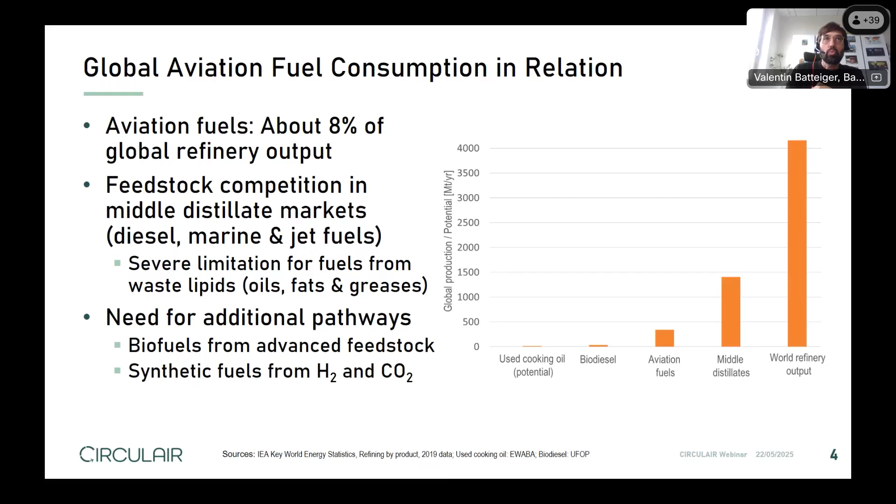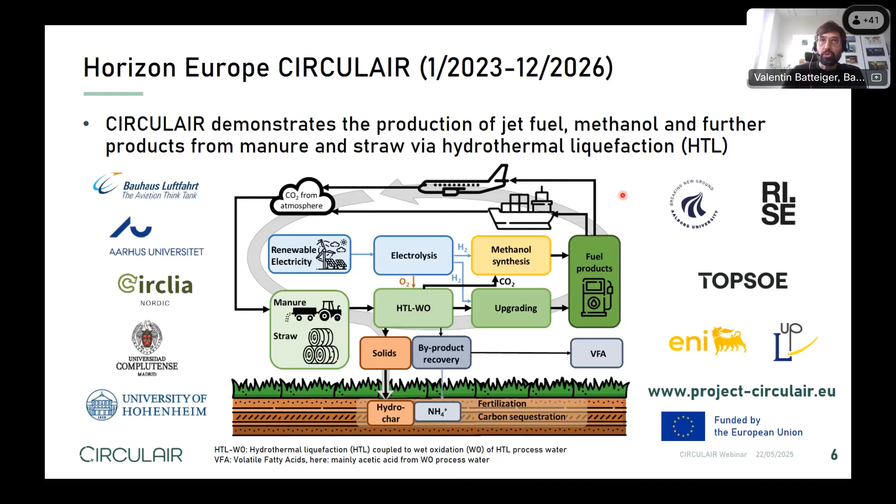So we were starting building a lot on preceding Horizon 2020 projects, where one example is HyFlex Fuel, where our project partner, Aarhus University, was running a pilot plant. Then there is another project partner of ours, Circlia Nordic, that is already going into upscale at higher technology readiness level and larger scale with a very specific business model.

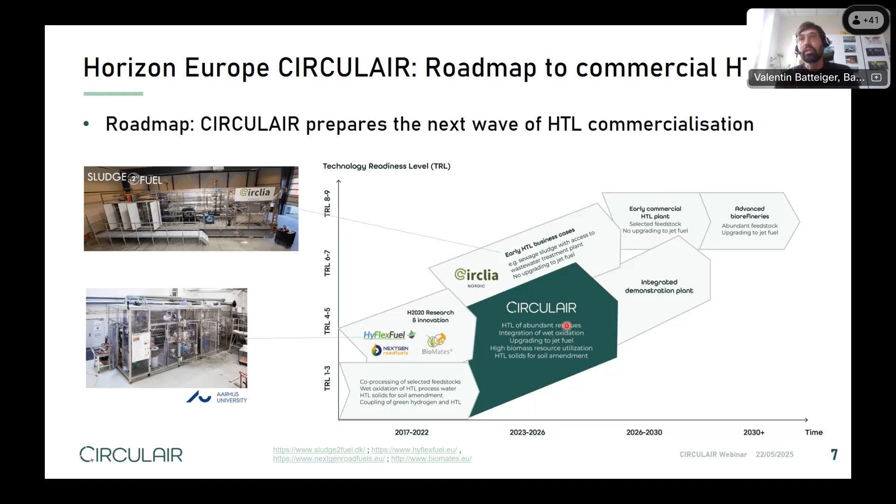And we at CIRCULAIR are, so to say, preparing the next wave, looking at a very holistic thing and also developing additional technologies that can be important to bring it into the system in the next wave of commercialization.

So what is the ambition beyond the state of the art in HTL in this project? One important thing here is this integration of HTL with wet oxidation of the HTL process water. And relating to this is the recovery of suitable byproducts from all major process streams.

The organic species are mainly then converted into CO2 and volatile fatty acids that are then still in the process water and could be recovered. And the CO2 can then be combined with hydrogen to form methanol. So this is the big chunk to get a much higher carbon efficiency of the overall process.

And then we also look at the CO2-rich HTL gas, utilization of the solids and so on to get to a very high product fraction at the end of the day. And we also look at the upgrading of the biocrude here in this project.

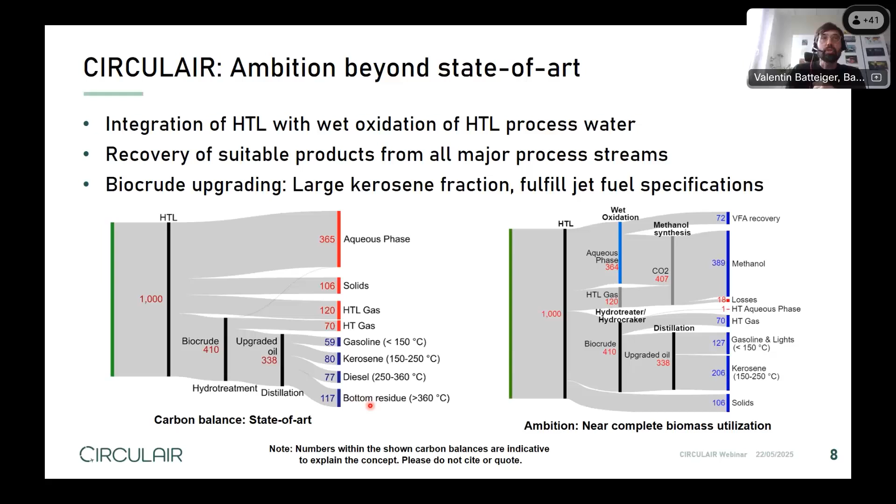And this translates now into four main objectives that we have in the project. We want to contribute to the development of cost-effective pathways to biofuel production from abundant feedstock. We want to produce a high share of on-specification jet fuel from HTL biocrudes.

We want to prepare for near complete biomass utilization, and I have not really mentioned that before, we also want to enable negative contributions to the greenhouse gas balance of HTL fuel production. And this is mainly via the solids in this project.

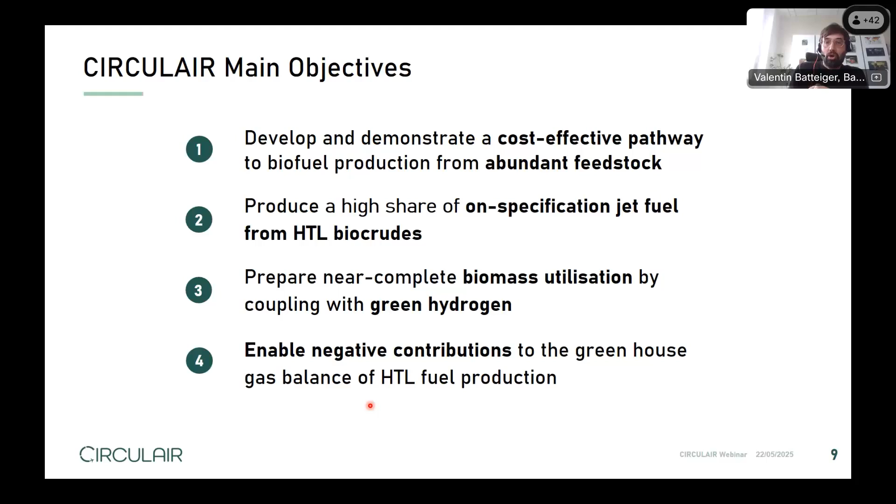Okay, one word on the feedstocks. So why are we looking at manures and straw? This relates back to the HyFlex Fuel project, the preceding project, where former project partner DBFZ was analyzing residue and waste availabilities in Europe.

The other thing is these potentially cost-effective pathways. So cost efficiency comes from HTL itself, which is increasingly perceived as a prime option for wet waste conversion to biofuels because we don't have the need to dry the feedstock. We work with an aqueous slurry here. But one thing that results from this way of hydrothermal conversion is the process water, and this is challenging to deal with. So the process water looks like this.

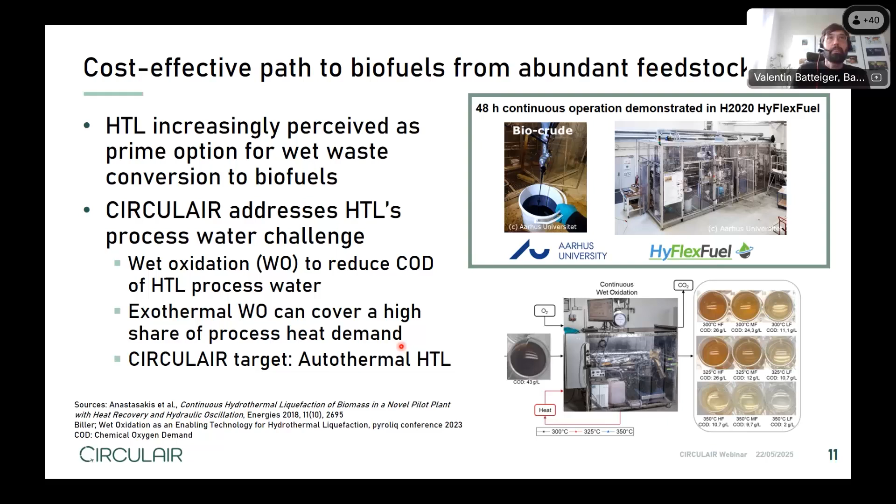And this is the pathway that we again want to demonstrate here for the specific biocrudes that we are producing. In parallel, we look at slurry upgrading as an alternative or amending technology to fixed bed hydrotreating, and we investigate hydrocracking as well in order to, at the end of the day, really have a higher share of the jet fuel product.

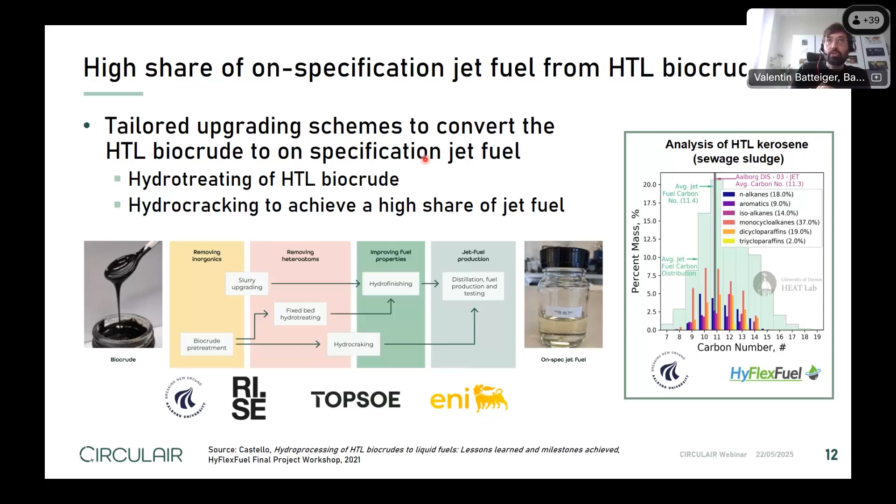Next thing is the utilization of co-products from all of the major streams that result from hydrothermal liquefaction. When we look at the process water from wet oxidation, mainly volatile fatty acids with a high share of acetic acid could be recovered via liquid extraction or via adsorption, and also the ammonia could be recovered via adsorption, potentially using HTL solids, so preserving some of the fertilizing effect.

Then the next big thing is the CO2 streams. Both the HTL and wet oxidation gas contain mainly CO2, more than 90% in these streams. And when we recover it and clean it up sufficiently, then we can use it, for instance, for methanol synthesis using green hydrogen, so with a coupling to the power-to-X world.

And the last big thing is the utilization of the HTL solids. Here it's about analyzing what these solids are, and how we can modify these solids such that they are suitable for soil amendment and carbon sequestration via this amendment of the soils.

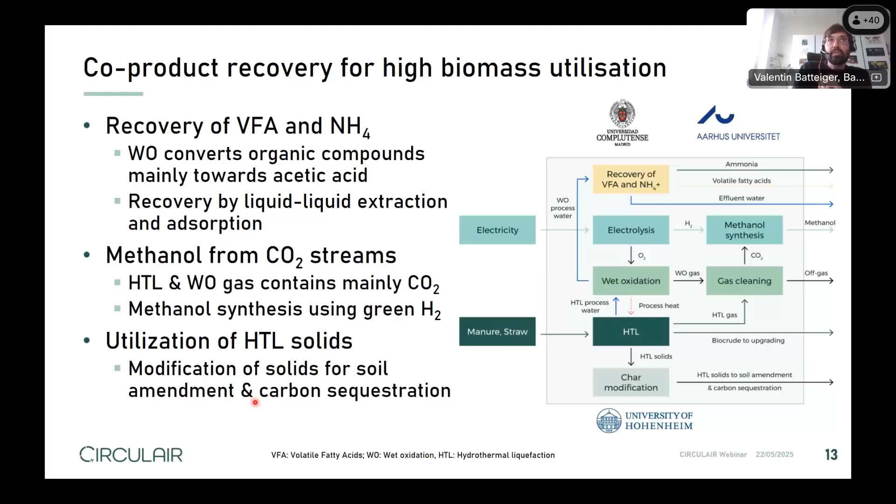So this is the third target, and the fourth one is carbon negativity, and this relates to the system analysis that we at Bauhaus Luftfahrt are contributing to the project. Here I show some preliminary results that stem from a two-step approach for the system analysis. One is an initial modeling of the fuel pathway pretty early in the project, and then a first evaluation of fuel production costs and LCA. This is a step that we have just finished, and where you now see the preliminary results.

And then in the second half of the project, we will go into refined modeling, and at a later stage of the project, we will have the final system analysis results available. So what you see here today are these preliminary results from this first evaluation. And in terms of LCA, we see an 84% reduction in global warming potential compared to a jet fuel reference.

This would already be compliant with the EU Renewable Energy Directive, which for biofuels foresees a minimum of 65% reduction. One has to say that it's as good as 84% reduction, because we are utilizing renewable heat here that comes from this wet oxidation, and we also utilize mainly renewable hydrogen for the upgrading and also for the methanol synthesis. So this is the key here.

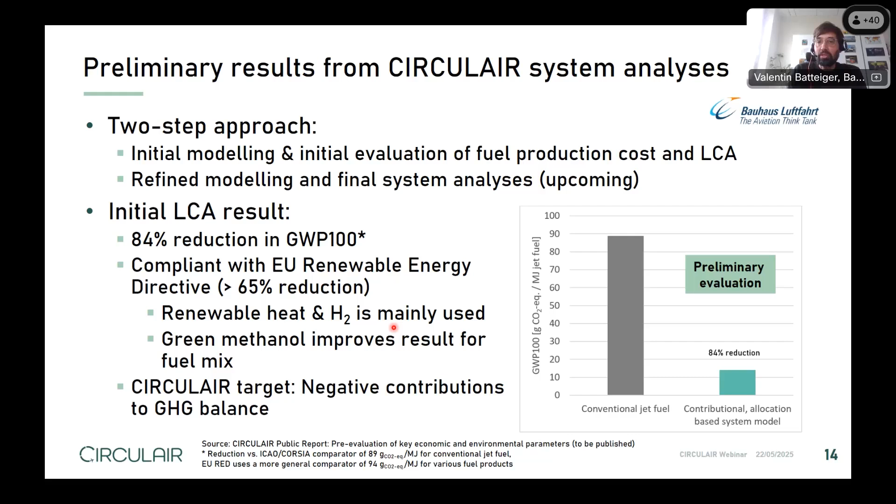And also one may expect that this result of the fuel mix is somewhat improved also by the green methanol. But in any way, this 84% is a nice signal in first place, but it's not yet at target with what we want to show in CIRCULAIR, which is negative contributions to the greenhouse gas balance. But here we have not yet implemented some of the main levers that we have. So what are the main levers to achieve these negative contributions?

So one is the HTL solids for carbon sequestration. This is in this other analysis, but it's not yet a good value that we have here. So here, University of Hohenheim is currently investigating the utilization of stabilized HTL biochars for soil amendment in agriculture, and they will also evaluate the carbon sequestration potential, and this evaluation will then go into the final results that we will have. What we have also not implemented is a credit for a change in manure handling practice.

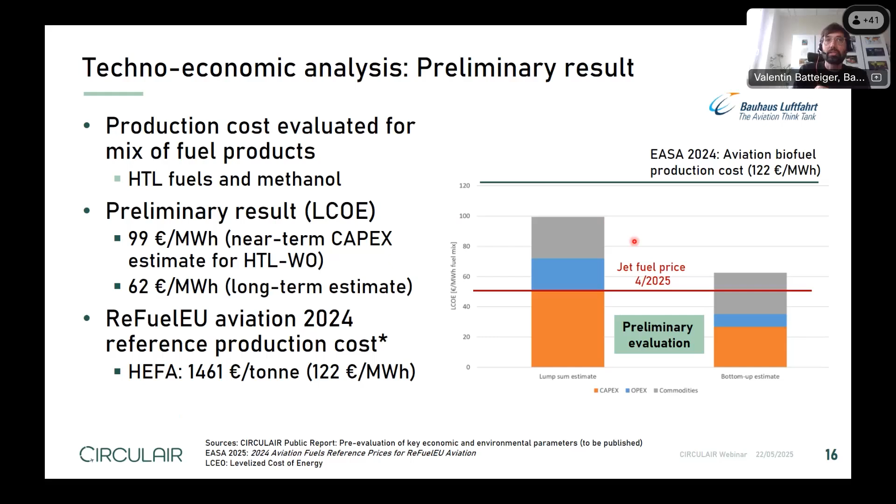And what I have shown here as two lines for comparison is the current jet fuel price, and this up here is some reference value for aviation biofuels. So mainly this should be HEFA that is provided by EASA in the current report to estimate the fines for ReFuelEU Aviation. And what you see here is a jet fuel production price that is somewhere in between. So this is certainly something that looks promising from this early perspective.

Summary and conclusion. So at the beginning, I motivated that we need liquid fuels to achieve the climate targets in aviation and in shipping. And very specifically, we have a specific need here for scalable fuels from advanced biomass, wind and solar. And this then also introduces the next presentation by Oskar, where this will be a key topic. Now, the CIRCULAIR perspective, we are aiming really at HTL conversion of abundant agricultural residues that could really provide large volumes of fuel. One important thing is that we address the HTL process water challenge by wet oxidation.

We want to maximize jet fuel yield and quality by appropriate upgrading schemes, then enable almost complete feedstock utilization by coupling with green hydrogen and recovery of products from almost all process streams. And we want to investigate the use of HTL solids for soil amendment and carbon sequestration. So these are the main aims of the project. And what I have shown towards the end is that pre-evaluation of fuel production costs and global warming potential fosters our motivation in the project, and it also points to some main levers for further improvement.

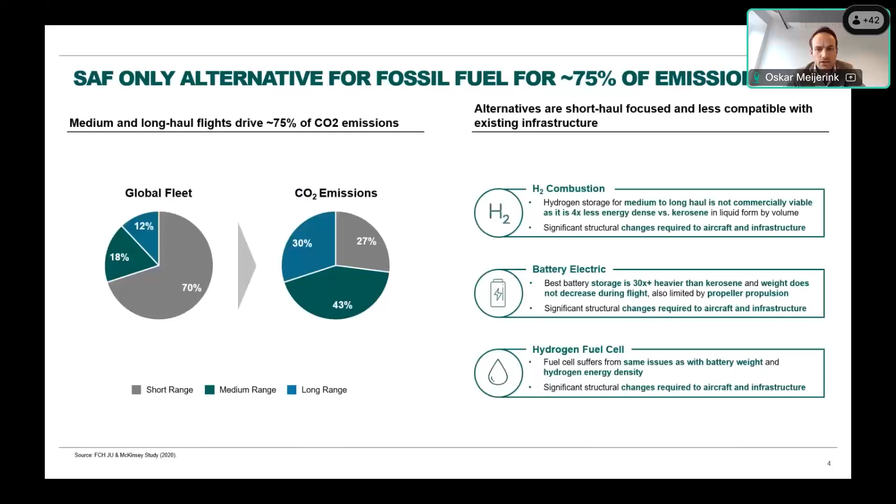So what you see on the left-hand side is always quite an interesting element to show, because about 70% of the global fleet and flights is short range flights, but those only account for about a quarter of the emissions. So you see that the medium and the long range flights account for almost 75% of the emissions, which are also the most difficult to decarbonize. So for some of those short flights, we see battery electric and some hydrogen combustion potential. But for these medium and long range flights, that's very challenging. And so for that, we are eyeing sustainable aviation fuel as a solution for the decarbonization of aviation.

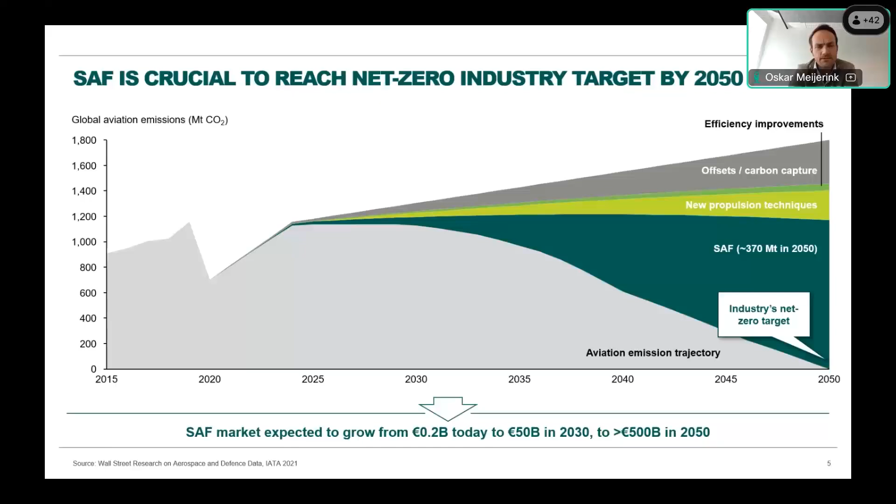With that in mind, we can see that sustainable aviation fuel can be produced by a number of pathways. So you may have seen many of those. We always like to say that SAF can be made from 3 buckets of feedstock. So on the one hand, and that's the dominant pathway today, is from waste oils and fats. So that's what we call the HEFA pathway, for example. It's waste oils, used cooking oil, residues from animal fats, for example.

The upside is that technology is very well proven. It works well. There's facilities out there. There's renewable diesel. There's SAF production. But the limitations are obviously around the feedstock availability. And we'll come back to that in a few slides. But the upside is that it works. It's ASTM certified. So that means that it can be used in commercial aviation, and is happening today.

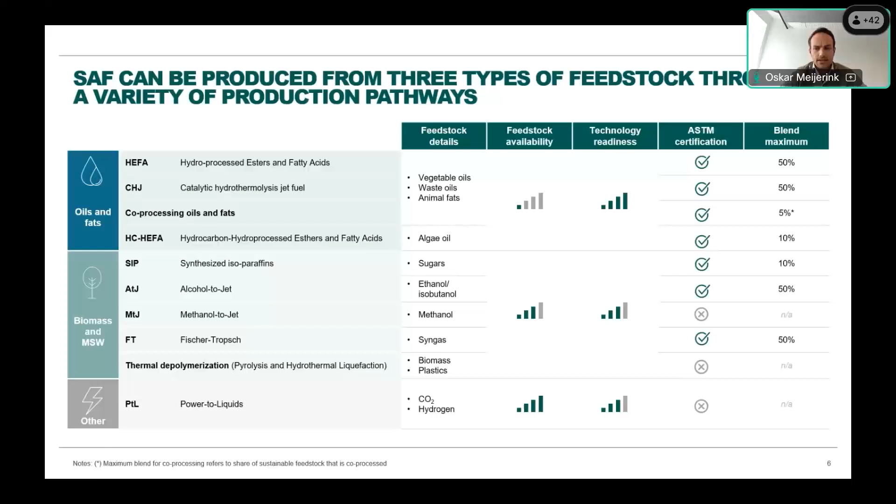And then the final one is the e-SAF pathway, or the power to liquids pathway, where you use CO2 and renewable hydrogen and can use that in the pathway. It shows that it is not yet ASTM certified, or it shows a cross there. That depends a bit on the pathway. If you're using a Fischer-Tropsch pathway, it is actually qualified. So some new pathways may need ASTM qualification, but many are already qualified. So that's not entirely the case. So that's good to note on this slide.

With that bit of an intro on sustainable aviation fuel, happy to take any questions in general on that. Very quickly on SkyNRG, we've been in this market for 15 years. We were founded in 2009, and the first, let's say, 10 years or so, we were focused on creating the market for sustainable aviation fuel. So we've done a lot of the initial flights, the first commercial flight together with KLM, the initial corporate biofuel program where we allowed corporate passengers to fly on SAF, but also the first, let's say, continuous supply chains in the US, for example.

Since 2019, we started to develop our own production capacity, and we're working on that together with our partners like Boeing, KLM, but also our recent investor, Macquarie Asset Management, that stepped in in 2023. We're now focusing on activities across the value chain. So we're both on the R&D side, active in projects like CIRCULAIR to understand what is out there, what technologies work, which pathways we could use in our future projects, as well as the capacity development and the production side, where we're aiming to actually build those facilities and operate them. And finally sell the fuel and supply that to the airports. We do some advisory work across that network as well, because we have built that expertise, and sell that to clients that are interested in learning more about the SAF topic.